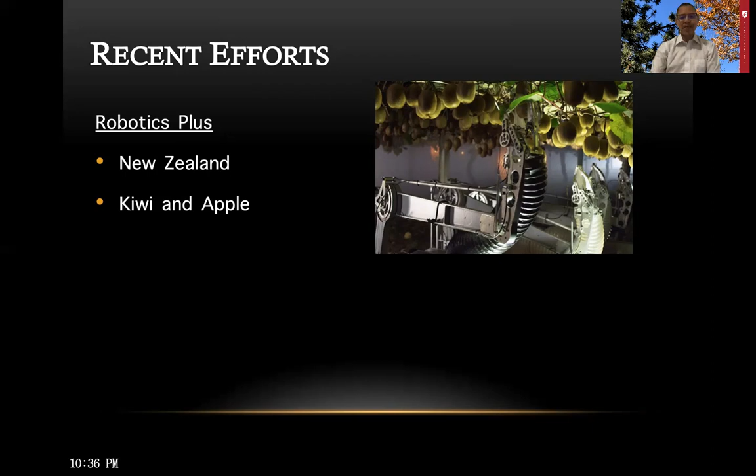In terms of startup and other companies working in these automated robotic machines, here is an example from New Zealand, Robotics Plus. They're working in kiwi and apple harvesting. They have been working in this area for a few years now. There is a company down in Florida called Harvest Croo. They're working on and to some extent using these big strawberry harvesting machines in commercial fields.

There is this company from Israel called FFRobotics, focusing on apple harvesting. I collaborate with FFRobotics, and we have a machine that has been tested in orchards here in Washington as well as in Israel in the past couple of years. I'll talk more about this effort towards the end of the presentation. Another company called Abundant Robotics is out of California, and they're also working in apple harvesting with a real serious focus on commercializing in the near future.

With all these efforts, we still face a few challenges or limitations in terms of developing automated robotic solutions. So far, I presented examples mostly looking at fruit picking, but that is true for other robotic solutions in orchard operations. For example, the robots that we have developed for pruning and thinning and other orchard applications face similar limitations, such as lack of desired speed, accuracy, and/or robustness.

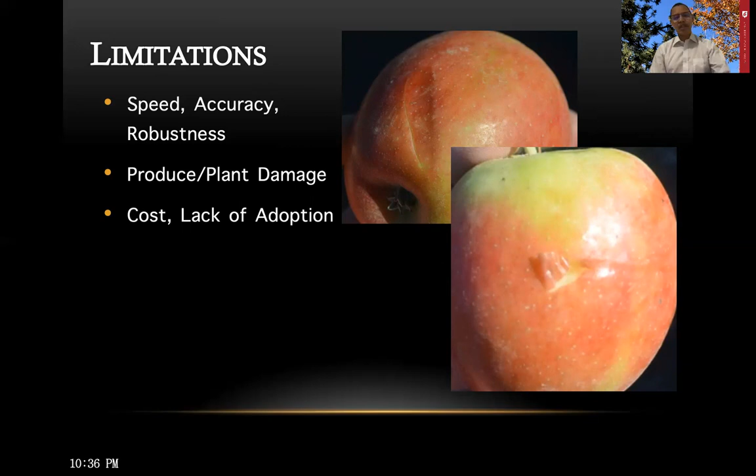Sometimes these machines also cause produce or plant damage, and certainly agriculture runs on a really thin margin, and cost becomes an important factor. If the cost is high, lack of adoption becomes another bottleneck, and there is this cycle of high cost and low level of adoption, making it very difficult for these new technologies to get into wider adoption.

So to address some of these challenges, the WSU Center for Precision and Automated Agricultural Systems, particularly my research program in this center, has focused on various aspects of automation and robotics in fruit and vegetable crop production. In the next 15 to 20 minutes, I'll be talking mostly about fruit harvesting and pruning efforts that have been going on in my lab over the last 5-6 years.

First, let's talk about apple and cherry harvesting efforts. In my research program, we're focusing on both mass and robotic harvesting systems. When I say mass, it's more like a large number of fruit at a time. And when I say robotic harvesting, it is one fruit at a time, more like a pick and place kind of technology. Mass harvesting, just to repeat, will be more like a shake and catch kind of system where a bunch of fruit are harvested simultaneously and collected somehow.

Different types of end effectors for both picking as well as shaking have been developed and tested in my lab, and different catching mechanisms, particularly for mass harvesting systems, and different robotic systems when we put all the components together into a system.

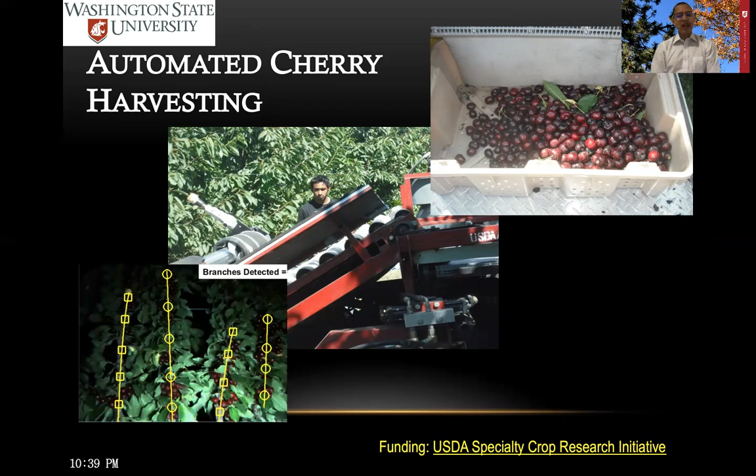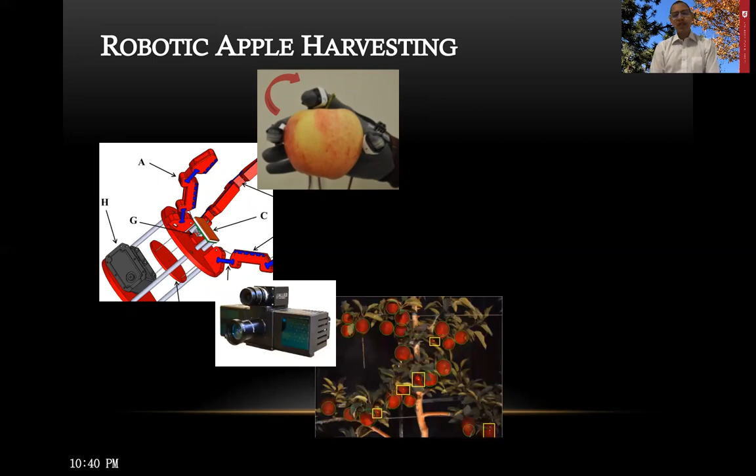We also have certainly developed 2D and 3D machine vision systems and a fusion of those to detect and locate where target apples are, and have integrated everything together into a robotic picking machine. In this case, we see a custom designed and built robotic manipulator, and we see a soft robotic hand picking apples.

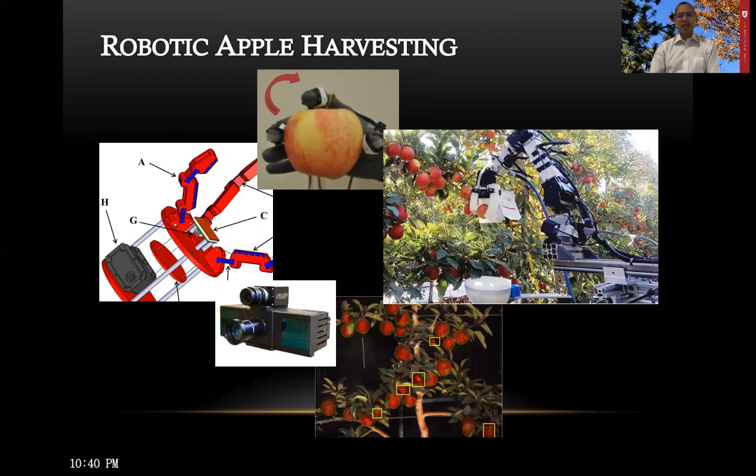Before I show a quick video about this robot, I'd like to present some of the machine vision algorithms and techniques that were used in detecting and locating apples. As I mentioned earlier, we have color and 3D machine vision systems fused together to remove the background and remove the rows of trees that are not adjacent to where the machine is, and that simplifies the overall canopy environment for further processing and finding target apples.

And certainly overlaying 2D and 3D is essential to locate those apples in the 3D space, so that the robotic manipulator would make a move to approach those apples. In addition to simple apple detection and localization, we have also expanded our algorithm using deep learning techniques, certainly, as we all are using certain kinds of deep learning models in our vision systems these days.

We have identified all kinds of objects in tree canopies, including apples and branches and leaves and trellis wires and trunks. And in addition to that, we have also looked at the topological relationship between these objects, so that we can find out the obstacles and the accessibility to these fruit, and also identify the most efficient or safe direction for the robotic arm and hand to approach these apples.

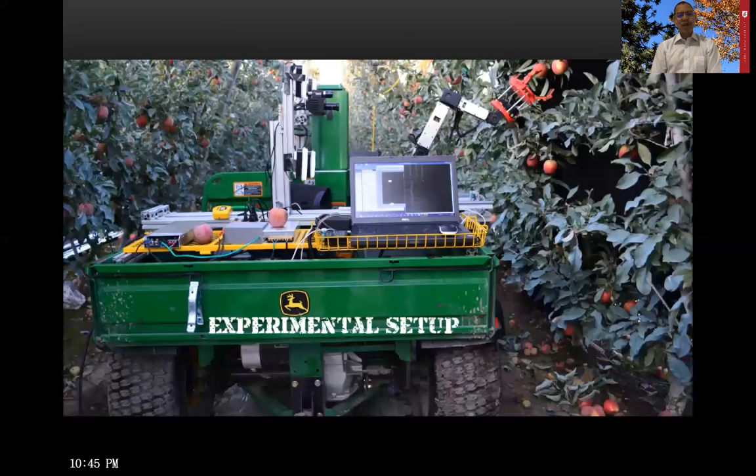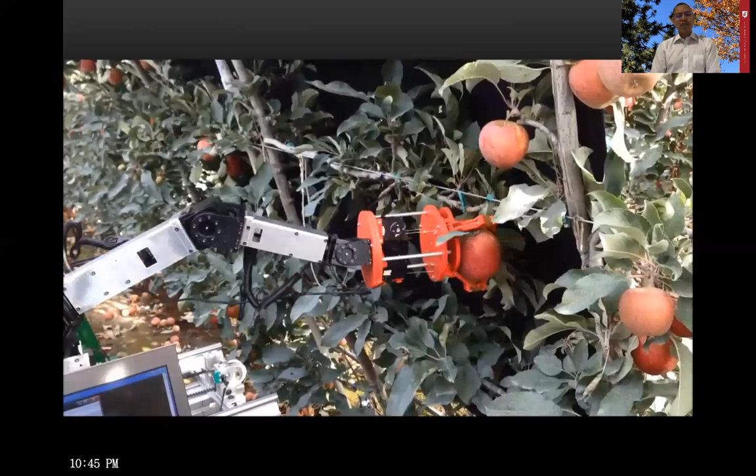So here is the prototype developed and tested in my lab over the last, again, 5-6 years, in collaboration with many researchers that I couldn't put names of in this short presentation. But as you can see, there is a robotic manipulator custom designed and built, and there's this robotic hand or end effector also custom designed and built using 3D printing technique. And in the second or third version of the robot, we have a soft robotic hand, that you can see in a little bit.

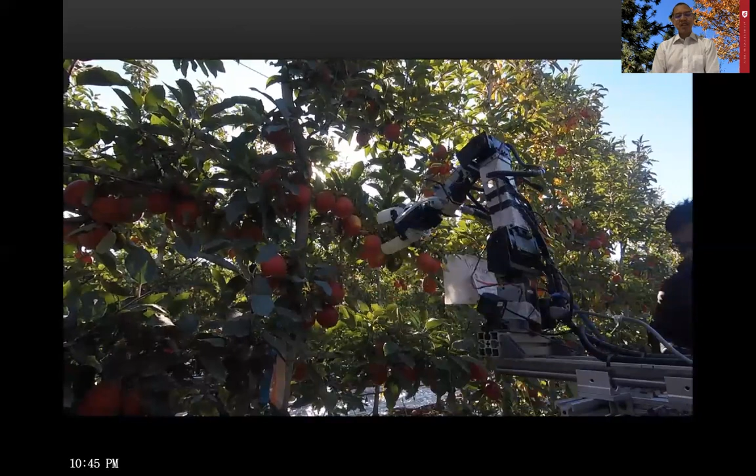In this particular prototype here, the fruit are being dropped on the ground, but in this second one, as you can see here, there is a collaborating catching robot, in a way a simplified mechanism, to capture the fruit that is being picked by this new version of the robot. As you can see, it has a soft robotic hand picking apples.

After we demonstrated the capability of this robotic picking system, we collaborated with FFRobotics. They were also working in the apple picking area for a few years when we started talking, and they had their experiences and a prototype machine. We had our experiences in a prototype machine.

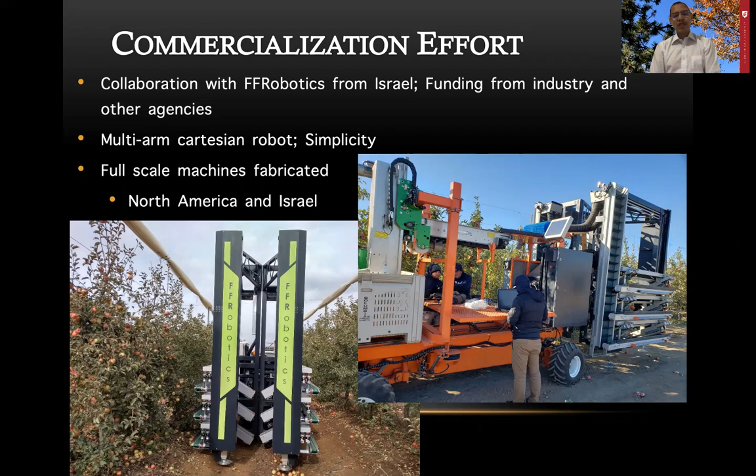There are papers published, knowledge gained, and we joined our efforts together and wrote proposals together to build this full-scale machine and tested it in different orchard environments here in Washington as well as in Israel. Here is a quick video of the

So robotic picking is one effort, one kind of technology that I believe has potential, and I think it will make it into the market fairly soon in the future. FFRobotics, Abundant Robotics, and potentially other companies all are pushing really hard, and I think there is a potential, again, there will be a commercial adoption of these technologies soon.

Now, there are situations where I believe targeted shake-and-catch and other technology that I'm developing would be applicable for some of the varieties and some of the canopy architectures. The promise with this one, however, is that we are harvesting a large number of apples at once, and the throughput of this harvesting process becomes really fast when we're using this kind of targeted shake-and-catch

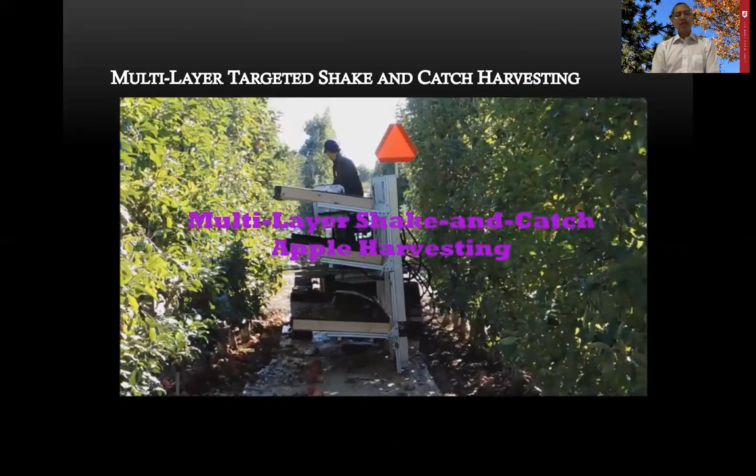And this technology has been really promising for varieties of Jazz and, I believe, others, where we have been able to keep the fruit quality really at a promising level. I think the best was about 10% on one of the varieties that we tested, and certainly the throughput, the amount of fruit that is harvested per unit time, is higher than other

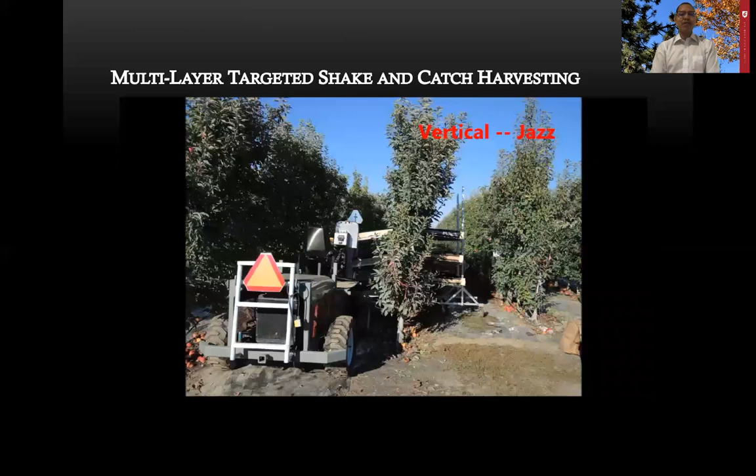In this example, we have only three catching mechanisms, but it could be extended to 6 or 7 or 8, depending upon the height of the tree, so that the entire canopy could be picked together, and the fruit quality could be maintained with a really short travel distance for the fruit from where they are to where the catching surface is.

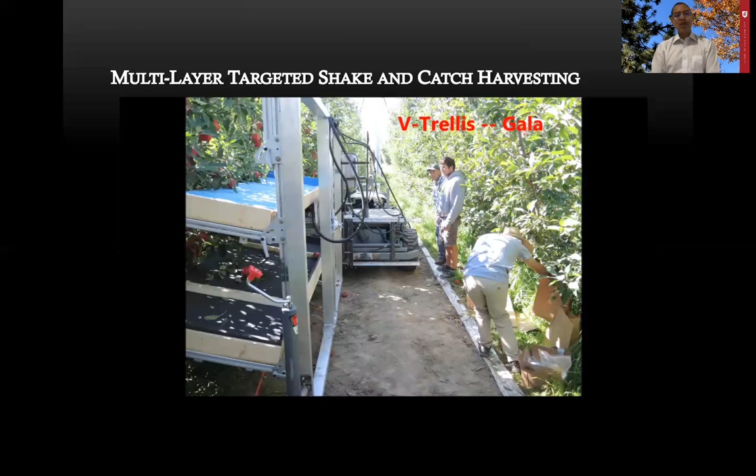In addition to the harvesting efforts, our center has also worked on developing what we call Bin Dog, an autonomous bin management or bin transportation machine that could drive through orchard rows on its own, find where the full bins are, pass over the empty ones if necessary, and pick those full bins and bring them out into the loading area. And this can also be used to actually deploy empty bins into those picking rows.

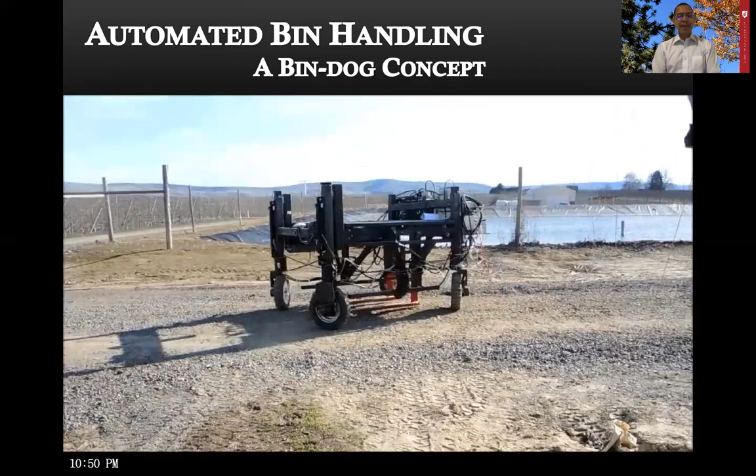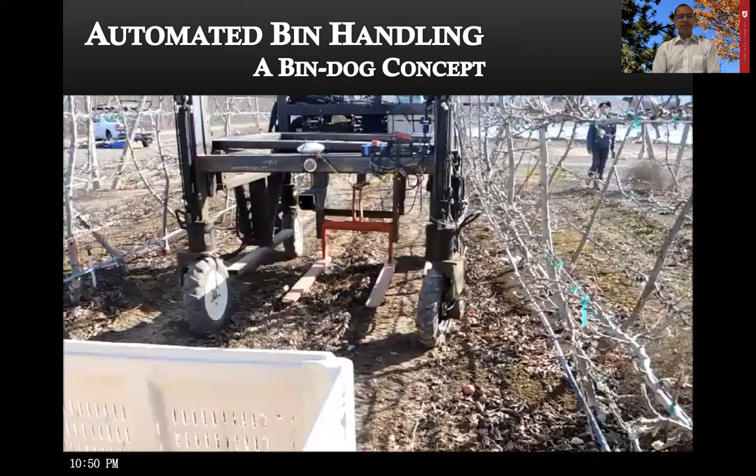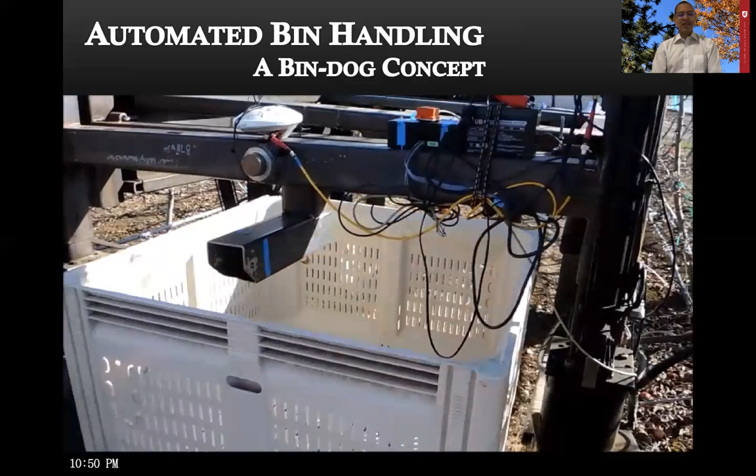Right now, as we are trying to get to this stage, we have an empty bin being picked. As you can see, we are testing this in the dormant season, but you see the concept of how a Bin Dog works, the one that we have designed and developed at our center.

Before I close the harvesting efforts, I just wanted to give a quick sense of what we are doing in the robotic strawberry harvesting area. This project is led by Dr. Yunjun Xu from University of Central Florida in collaboration with our team and Dr. Reza Ehsani from UC Merced. The concept here is to develop modular, relatively small robotic systems that would use multiple hands to collaborate and pick strawberries in these canopies in the field environment.

Certainly when the strawberries are completely visible, a single arm and hand would be working independently, but when these berries are partially or fully hidden inside the canopies, we intend to use two hands to collaborate and open the canopy and pick strawberries. And that's the concept here. And again, these will be a swarm of collaborative modular robots picking apples, strawberries, and also communicating among each other to optimize the overall harvesting operation.

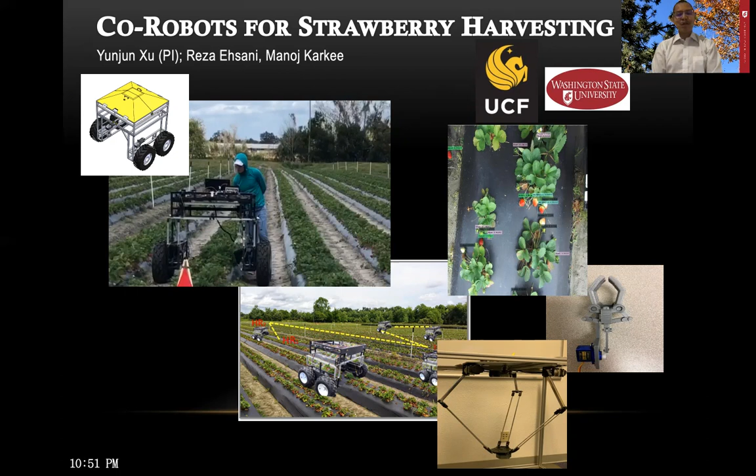Next couple of minutes, I would like to talk about apple and cherry tree pruning efforts in my lab. When it comes to pruning, it's very essential to understand how the pruning is performed and what branches are to be pruned out and what would stay there. To develop these ideas and find simplified rules that could be implemented by the robotic system, we have discussed with growers and horticulturists, and also have observed professional pruners as they perform their job in the field.

And based on those, for some tree architectures, we have started to put together pruning rules that would prioritize uniform fruit distribution in these trees, which, by the way, would also be very helpful for robotic picking, as pickers would perform much better when the fruits are uniformly distributed and have minimum clusters and minimum fruit behind trunks and trellis wires and such. Pruning would help us create fruit distributions that are friendlier for robotic picking.

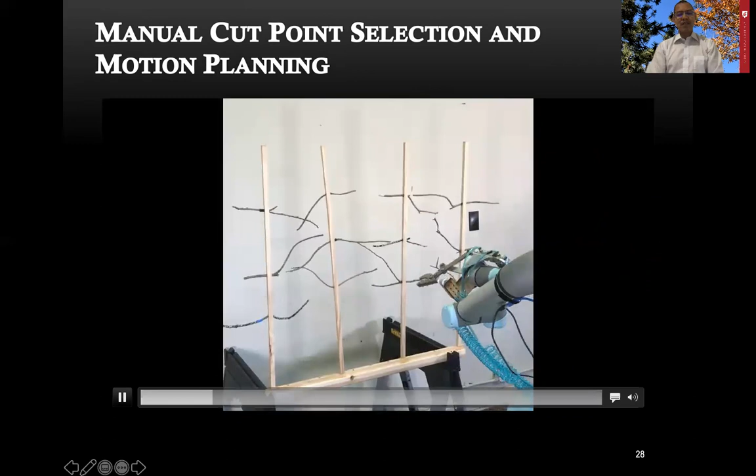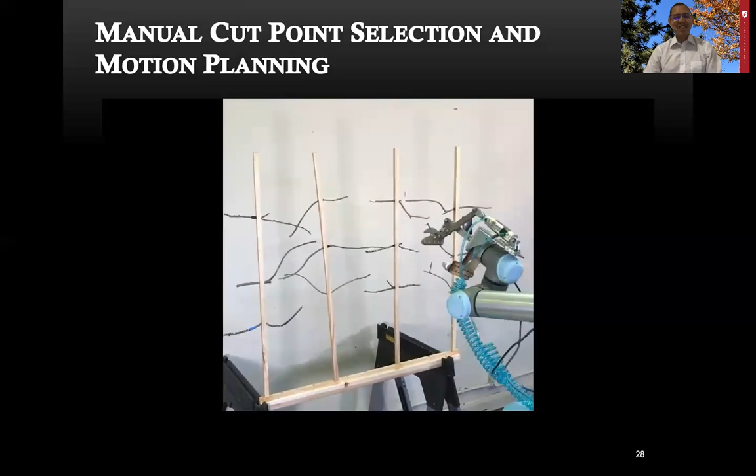Here is a quick video of our lab evaluation of the robotic system. As you can see, this is a UR5, Universal Robots 5 manipulator that is being used here. It has been slowed down so that we minimize the safety issues here. But you can see the concept that it can go to the target branches and cut them off.

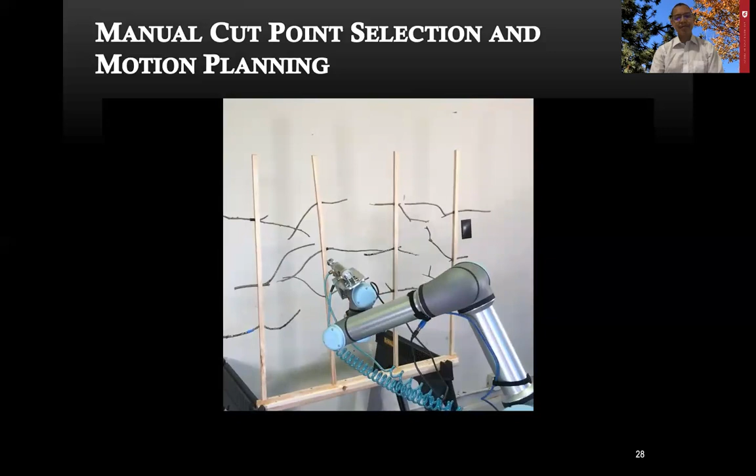In addition to manual pruning point selection and movement of this manipulator and end effector to target branches and cutting those off, kind of a proof of concept in the lab, we've also started putting together a machine vision system and decision support system to autonomously select cut points for these robots.

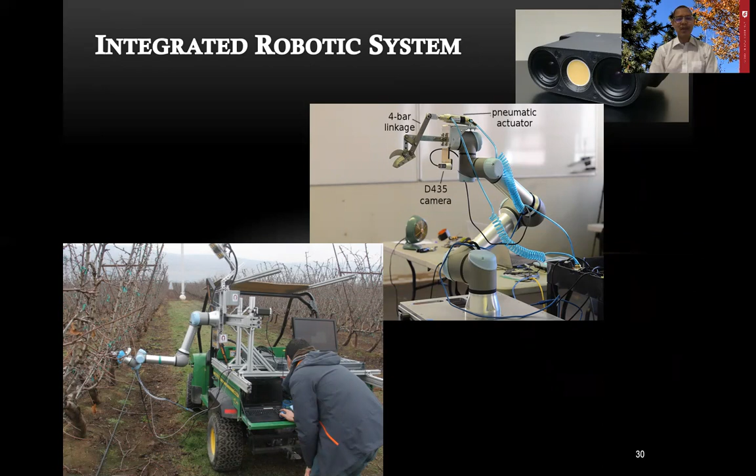Here is the complete integrated system put together using, again, Intel RealSense cameras, as you can see, and a little scissor cutter, pneumatically operated. This was tested in the field this last winter, but we couldn't be as successful as we wanted. So we're continuing to improve it, and we'll go back to further evaluate this system.

So before I close, I'd like to briefly talk about some of the challenges that we're facing in this area of automated and robotic field operations in apple and cherry orchards, which might be similar for all kinds of tree fruit crops, and where we might be going in the future. Achieving high harvesting efficiency and pruning efficiency, related to being fast enough and economic at the same time, is always a challenge in automating or using robotic systems in orchards.

For example, when we talk about robotic picking, even in modern orchards, we are only at about 65% removal efficiency with FFRobotics, at least with the robotic picking system that I have developed in our lab, and if it is a conventional orchard, it would be even worse, and I think it's not that practical for us to use the type of system that we have tested so far.

Speed, complexity, and cost is another aspect. We want our systems to be really fast, but at the same time, they need to be really simple and low cost so that they can be adopted by the farmers. And fruit quality becomes another issue when we are using certain kinds of technologies, and keeping fruit quality to the desired level is essential. I think we need to further investigate and improve our technologies to achieve desired fruit quality.